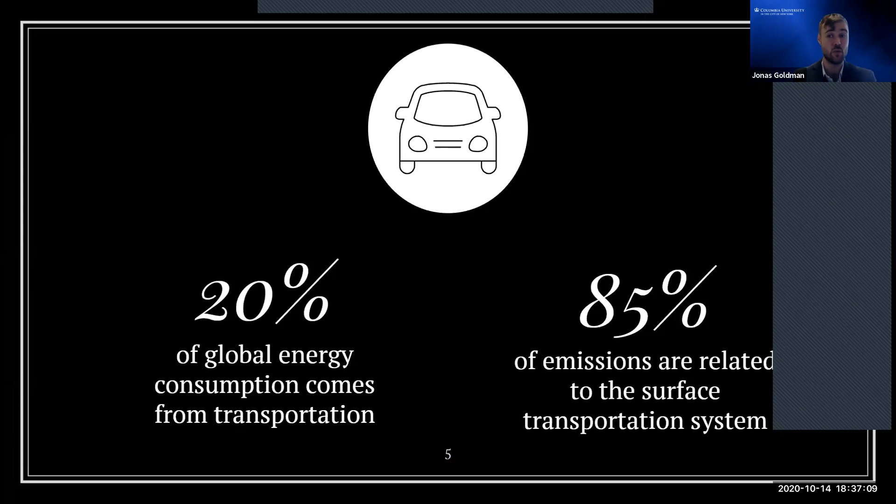And in the case of France, while emissions have declined significantly over the past 25 years, reducing 16.4% from 1990 to 2015, this downward trend in the transportation sector has since stagnated from 2015. And in the Eurozone as a whole, according to the latest European estimates, emissions have actually increased on average by 1.8% since 2018. French energy consumption is still on track to maintain stagnant emissions in the coming decades. So vast changes are going to need to be made in French cities if the country is going to bring its energy system in line with a zero carbon limit, especially in the largest energy consumer of all, transportation.

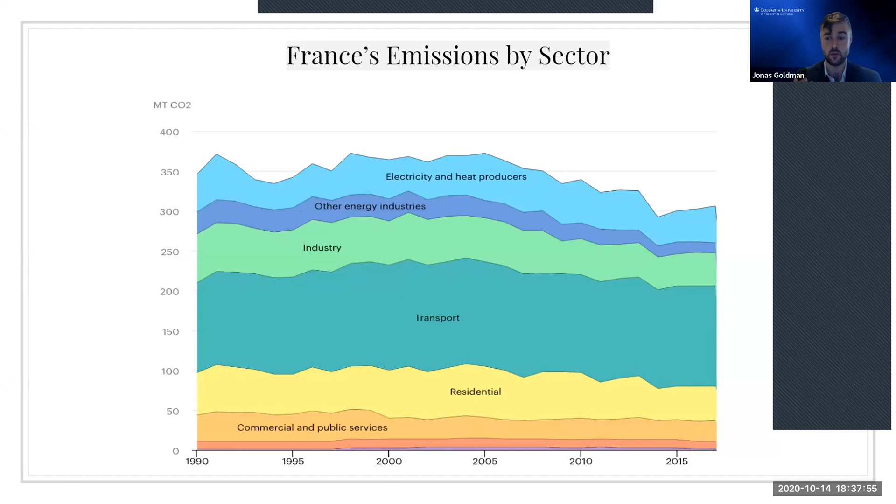But there is some good news. Paris is leading the way in this change, and its transportation authority, the RATP, has released a plan to meet all the city's bus requirements from zero carbon sources by 2025. In order to do this, the RATP plans to bring online 4,500 buses, 2/3 of which will be battery electric, and 1/3 of which will be sourced from biomethane harvested in a carbon neutral manner.

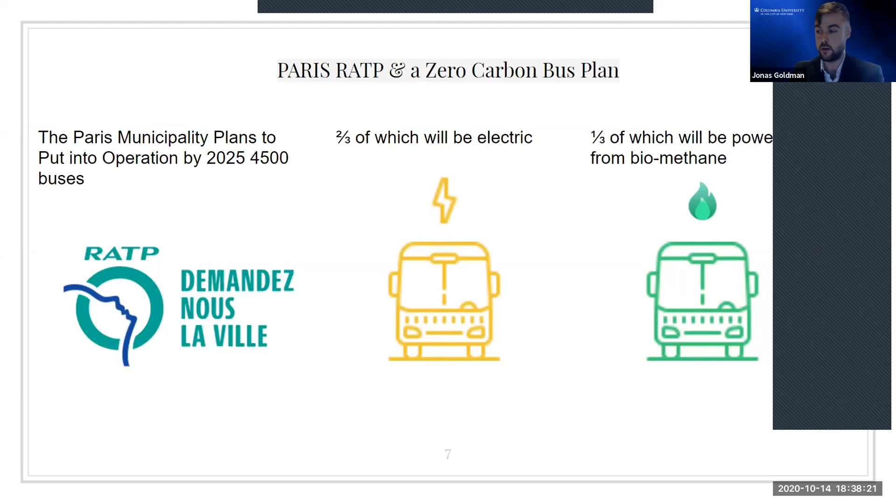these factors, a fully battery electric bus system would require a greater total number of buses to operate the same kilometerage of bus routes. Biogas fueled buses can travel further and take less time to fill up than current electric bus models. More idle bus time requires more buses to run the same number of miles in a given day. Meanwhile, adopting a methane-powered bus system not only provides for greater flexibility due to the charging limits of electric vehicles, but also would save on the infrastructure itself, the number of coaches, the number of required servicing infrastructure, the number of bus drivers, and other labor costs involved in service employees compared to a totally electric bus system.

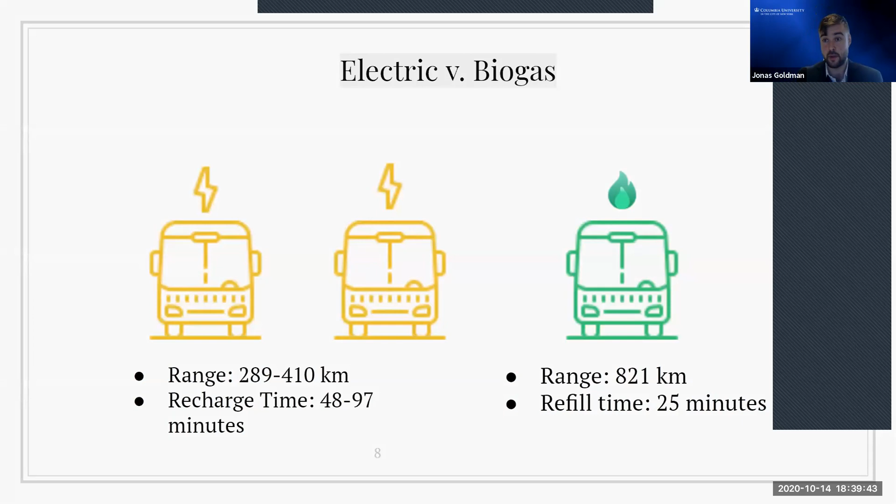Well, there are a couple ways we could power biogas from zero carbon sources. One thing that's been looked at is biofuels. While Paris has committed to sourcing the fuel for its compressed natural gas bus fleet from carbon neutral biofuels, it has as of yet not provided any details as to where these fuels will be sourced from.

And this presents a slight issue, as not all biofuels are less emissions intensive than the fossil fuels they are intended to replace. For instance, biofuels' worst offender, palm oil, due to the land use change involved in the destruction of carbon sequestering rainforests to make way for fuel crop plantations, creates a carbon debt from land use change that is estimated to take 420 years for the fuel generated annually from a hectare of palm oil to be less carbon intensive than traditional fossil fuel usage.

Rapeseed, another crop that has been touted as a source to provide carbon neutral biofuel, also has a higher emissions footprint than the fossil fuels it intends to replace, and resulting land use change in meeting the fuel needs.

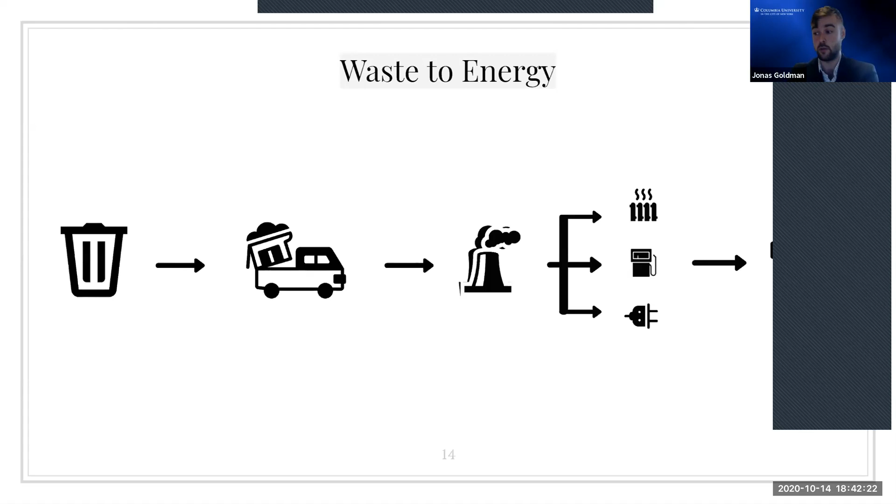In order to create fuel from waste, the following chemical process will be used. However, currently, Paris's wastewater treatment plant infrastructure collects a biogas composed of 50 to 70% methane and 30 to 50% carbon dioxide. Meaning to be used as a carbon neutral bus fuel, it would have to be further refined into a more pure methane.

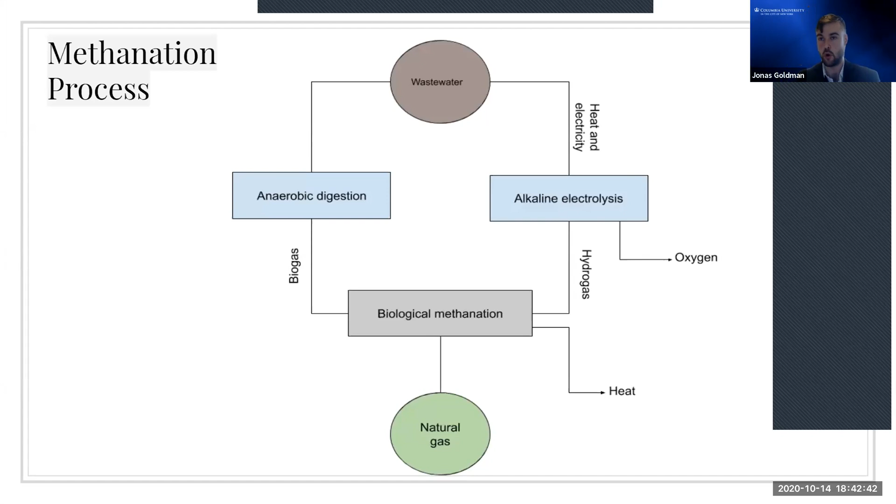Currently, Paris collects 528 gigawatt hours annually of biogas from its two largest wastewater treatment plants, the Seine Aval and the Seine Amont facilities. 86% of the city's harvested biogas, or 456 gigawatt hours, is collected from the Seine Aval plant.

Of this, 60% is used to meet the thermal demands of the plant required by the sewage treatment process: heating the sewage, boiling water, while the remaining 40% of the biogas harvested is used to meet internal electrical requirements of Paris's wastewater treatment plant infrastructure.

If the city is to achieve carbon neutrality, biogas currently utilized to meet the thermal demands of the city's wastewater treatment plant infrastructure should continue to be used for thermal purposes. Otherwise, some form of fossil fuel will likely need to be shipped in and combusted to make up for the shortfall in thermal energy and to provide the necessary heating energy.

However, this still leaves 40% of biogas currently harvested from the city and used to meet the electrical demands of Paris's wastewater treatment plants that could instead be converted into biomethane and used to fuel the city's compressed natural gas bus fleet.

Given the abundance of low carbon electricity from France's nuclear output and the energy density of biogas compared to electricity, it would make more sense to utilize any available biogas resources towards meeting the needs of Paris's transportation sector, where France lacks a lot of low carbon options, instead of directing it towards meeting stationary electrical energy demands like that of the city's wastewater treatment plants, for which France has low carbon electrical energy in abundance.

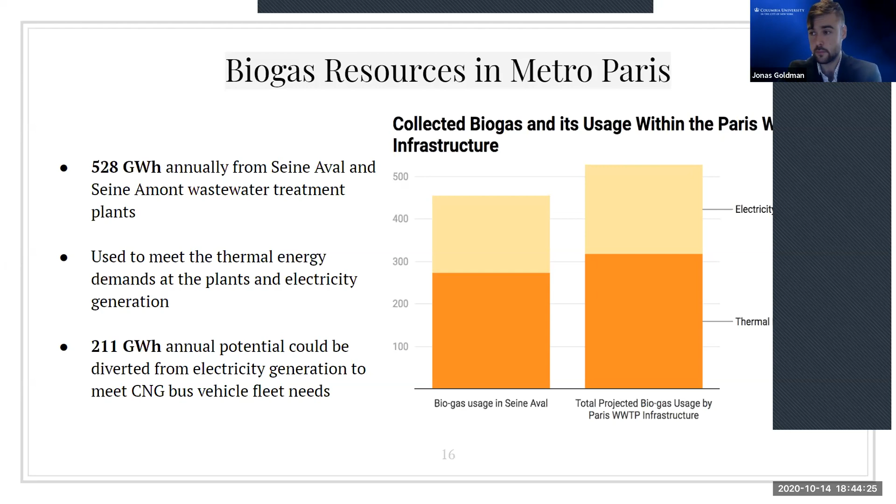So what is the potential of this 211.2 gigawatt hours of biogas currently harvested within the city of Paris to meet the city's transportation needs? How far and how much of the bus fleet can we run off of currently collected biogas resources?

We found if rerouted and refined from biogas into biomethane, the biogas that Paris currently uses to supplement the electrical energy demands of its wastewater treatment plant infrastructure could operate 89% of the total kilometers the city's buses travel in a given day.

The greater range and reduced time to refuel compressed natural gas vehicles compared to battery electric buses means that each compressed natural gas vehicle would likely be expected to travel a greater percentage of the Parisian bus routes than their electric vehicle counterparts. However,

biogas that's currently harvested within the city is more than enough to meet this energy demand of Paris's compressed natural gas bus fleet. The biogas capacity of Paris currently used for electrical demand could be rerouted without impacting the thermal requirements of wastewater infrastructure, and as I said, would provide more than enough to operate its local transportation needs. Creating an energy solution that is both zero carbon, local, and resilient.

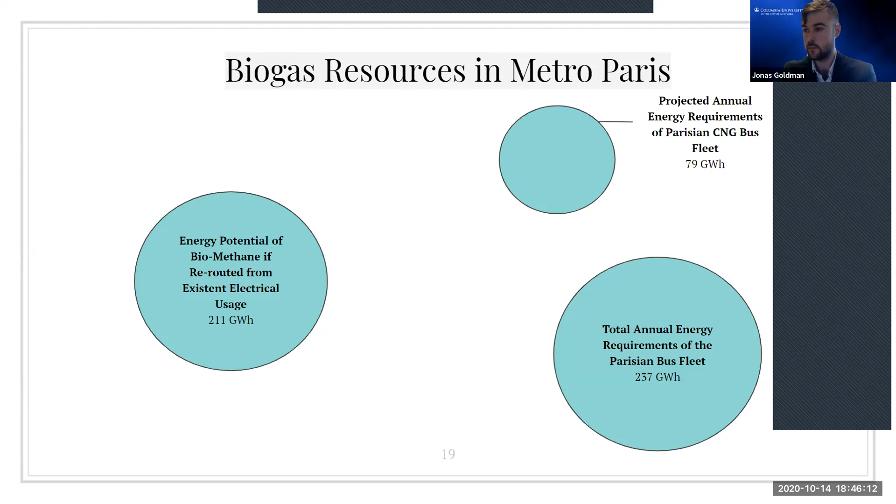And the Paris Public Transportation Agency is already building the infrastructure to handle methane for its bus fleet, having placed an order for 1,500 buses compatible with methane. The demand for methane will be there by 2025. The question is simply how city decision makers will meet this energy demand. And this is why our proposal is so important.

As while the Paris municipality has stated its intention to operate its compressed natural gas bus fleet solely from carbon neutral biomethane, it has not yet released a plan as to where these resources will come from. And while there is no current sourcing plan for carbon neutral biomethane, what there is in France is an established fossil fuel energy import system for natural gas, as the country imports 60% of its liquid natural gas fuel from nearby Algeria. Without a readily available alternative, it would be easy to fall back on relying on Algerian energy exports due to the existing established energy pathway of convenience.

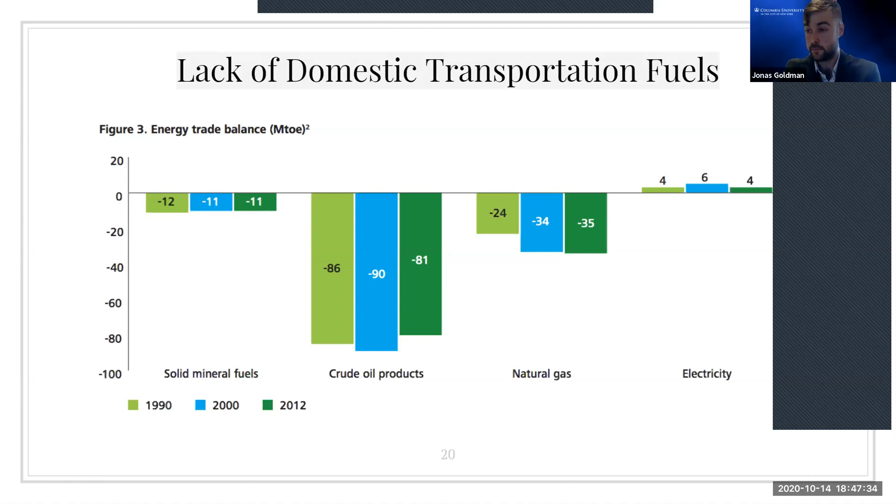In conclusion, we believe that by looking at Paris and other cities as an integrated energy system, a more strategic optimization of energy resources can be made within the system as a whole, rather than what is currently made by decision makers within the information silos of their own organizations. It makes sense for the managers of a city wastewater infrastructure, given the realm that they oversee, to utilize biogas for electrical energy needs of the plants they operate.

However, when the needs in terms of energy mobility and the limitations of existing battery electric bus technology are considered, energy use can be optimized by utilizing available biogas for use in transportation and sourcing the resulting electrical energy requirements of wastewater treatment infrastructure from the grid for stationary electrical needs. So we can actually meet both transportation and wastewater treatment plant infrastructure electrical energy needs in a carbon neutral fashion and meet our goals under the accords that bear the city's name.